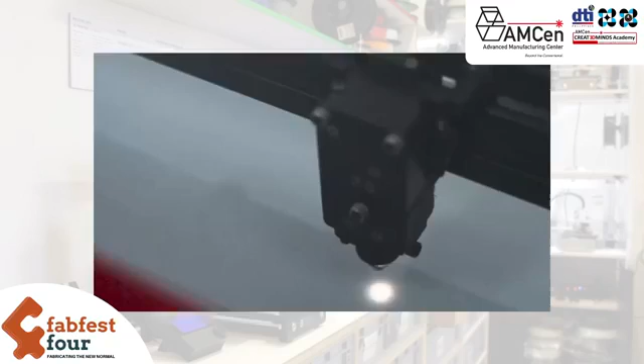A Fab Lab is an interdisciplinary space that promotes innovation through the use of digital fabrication tools. It's a modern facility that allows our SMEs to do prototyping.

For the last 1.5 years, we have been teaching them digital fabrication skills, which are very much in demand in the world market. For us, it really would support creation of maybe high-end products and development of new enterprises that are technology-based.

This will be the common service facility of industrial designing in the province of Bohol. There are even seminars, conferences, workshops conducted here so that Fab Lab enthusiasts and other designers would use the facility.

The concept was introduced to us by our Japanese volunteer, Mr. Yutaka Tokushima. He noticed in the course of his product development activities here that a lot of the problems in prototyping could be solved if we had the right equipment to do it.

We've catered to SMEs to really expand their market into the tourism sector. We have all these industries, and the thing is they're all spread out. I think having this Fab Lab would bring them all together.

True to its thrust in catalyzing innovation, DTI, through Fab Lab and its local partners, has initiated key programs, projects, and unique initiatives in the areas of waste upcycling and material engineering.

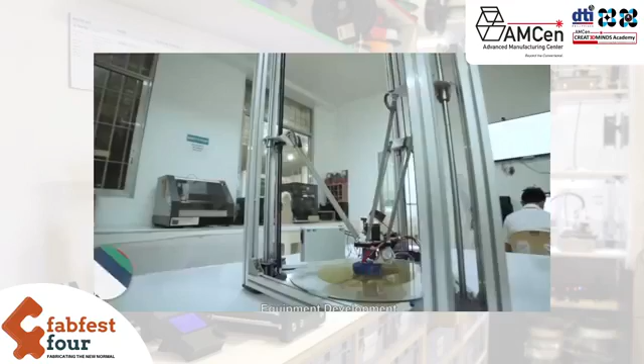Key MSME assistance initiatives such as product design, product development, productivity enhancement, and marketing solutions have been significant drivers in the improvement of grassroots entrepreneurs and homegrown innovators.

We do some native bags, placemats, wallets, curtains, and lately I do trophies and medals for the triathlon with the use of Fab Lab facilities.

The problem that artisans face here in Bohol are really the same challenges that any small business faces across the world, and that's how to get your product in front of your customer. So we developed a kiosk called the Made in Bohol Kiosk and sought to have it located in the luxury hotels where the tourists were staying.

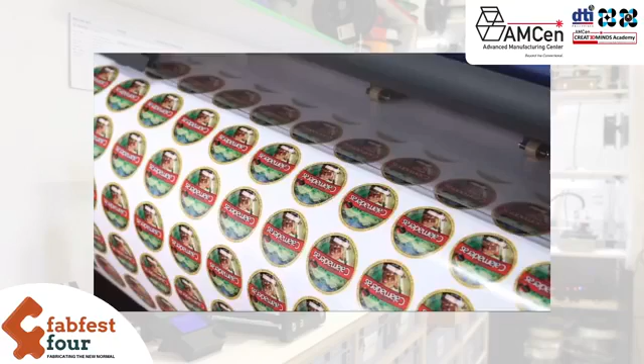When Fab Lab came, we had this partnership with them in order to become more competitive in the market.

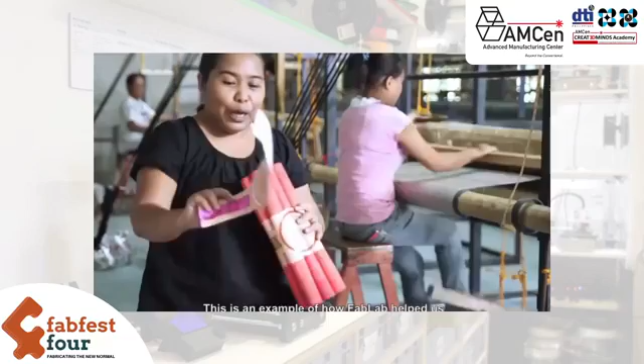So this is one of the Fab Lab products, our newest package for our placemats. We've sold a lot of these, and we're very thankful to FabLab.

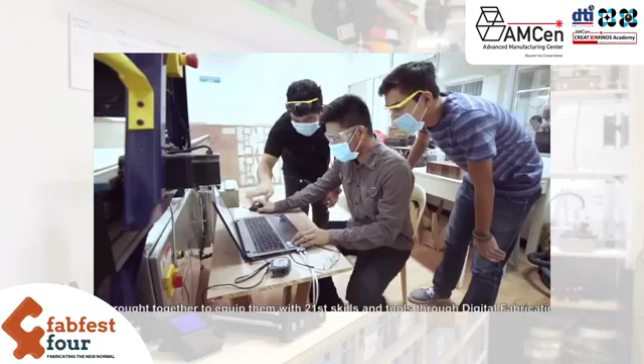To fuel global industry competitiveness, local entrepreneurs, students, and innovators are brought together to equip them with 21st century skills and tools through digital fabrication, technology trainings, and livelihood trainings and seminars.

It's for everyone. A lot of people really like to make almost anything. There's kids, there's adults, there's zero knowledge, there's some who already know a bit. When you see people come in with sparkly eyes, like, oh, this is possible, I can make something like this.

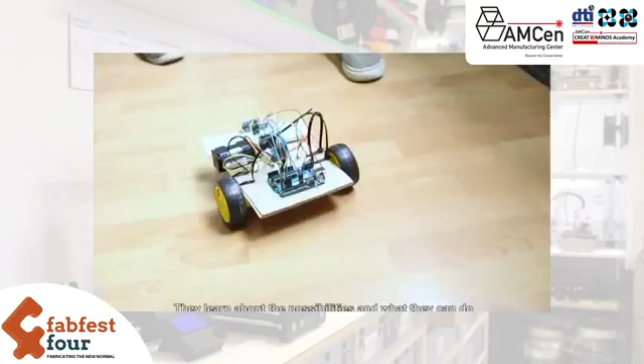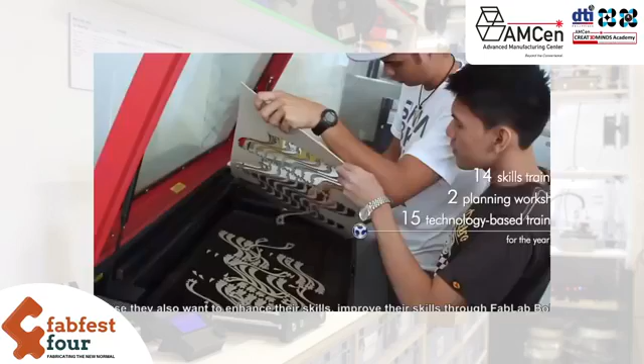The Department of Trade and Industry conducts workshops and trainings to help young local people here in the country, because they want to enhance and improve their skills by the use of FabLab Bohol. The concept of FabLab Bohol is to innovate and create inventions through digital fabrication. This FabLab should be duplicated in other regions because this is a good avenue for developing students' design skills so we could be at par with other countries in designing.

For me, it's like a gold mine. A gold mine for innovators because everything is there already: laser cutter, ShopBot, 3D printers, Arduinos, all these testers.

As of now, there are so many micro and kitchen-based enterprises that really need to improve or upgrade their technologies and equipment. That's why we are supporting FabLab, because it is our vision that this facility could help them in making those customized equipment.

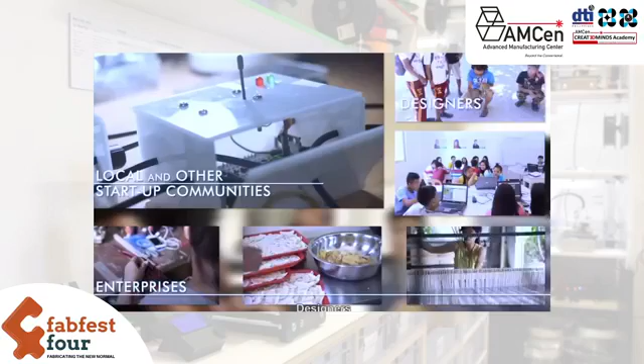The FabLab affords its users access to global knowledge through regular educational tours and access to the international FabLab network. Local and other Philippine startup communities, enterprises, designers, and enthusiasts are encouraged to collaborate amongst themselves to expand and strengthen their niche in various market networks.

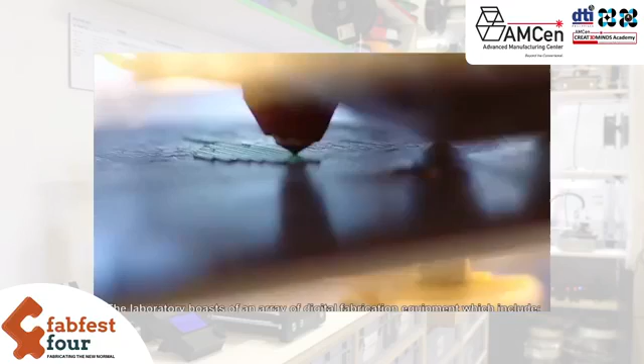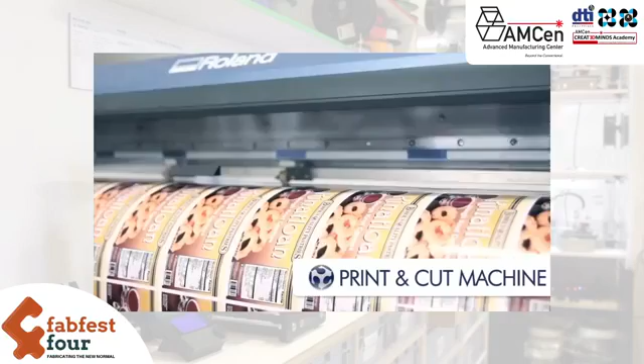The laboratory boasts an array of digital fabrication equipment which includes 3D printers, a digital embroidery machine, a print and cut machine, a CNC milling machine, and an automated wood milling machine.

FabLab Bohol also houses a pool of passionate in-house designers and highly skilled staff who can assist in 2D and 3D design, skills training, modeling, and production.

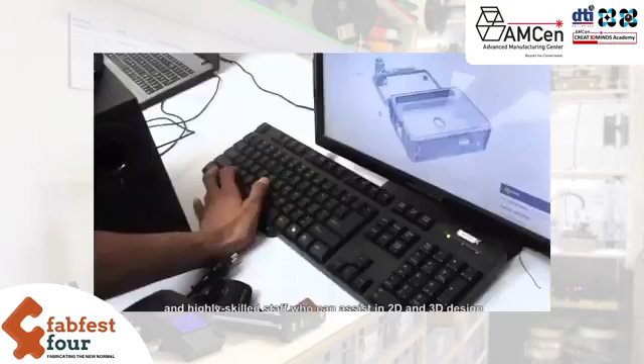Our task here is to assist those researchers and innovators. So what we did here is not for us to create their idea, but for them to create it themselves, and we will assist. In partnership with the DTI, Bohol Island State University, DOST, and the Japan International Cooperation Agency, or JICA, and the local community of enterprises, FabLab stands at the center of innovation in Bohol.

We are very thankful for the help of the DTI. They can give you a very good service and you really can come up with a very good product. We want the Bigan Weavers to really soar high, and our partnership with FabLab will bring us to that level. So thank you, FabLab and DTI.

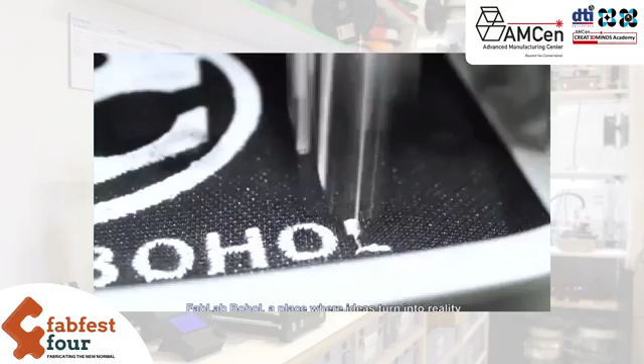FabLab Bohol, a place where ideas turn into reality. Ideas that can improve lives, not just for Boholanos, but for all Filipinos.

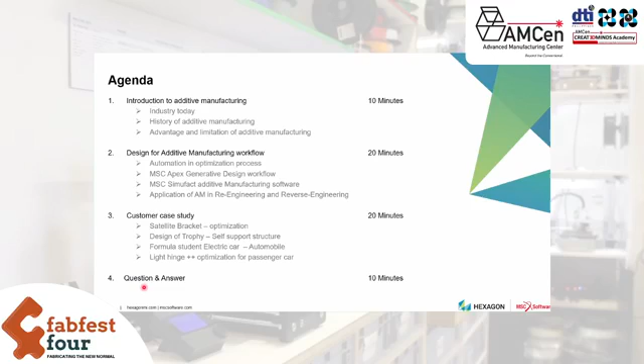Noted, sir. Thank you so much.

So today's industry, we talk about the industrial revolution, where we talk about different industries, like industry 4.0. If you look at each industrial revolution starting from 1.0, we have brought new technology to the industry. 1.0 talks about introducing mechanization majorly for the cotton industry, where human effort is replaced by mechanical gears and pulleys. Then 2.0 talks about introducing telephone and electricity, where the concept of batch production and mass production were brought into industry. 3.0 majorly talks about introducing computer and electronics, where we talk about more robots.

So we talk about software. When it comes to decision making, it should be able to make the decision without manual interface. It should be able to take the decision based on past history, or with the help of machine learning and artificial intelligence, so that it makes sure the errors are automatically corrected.

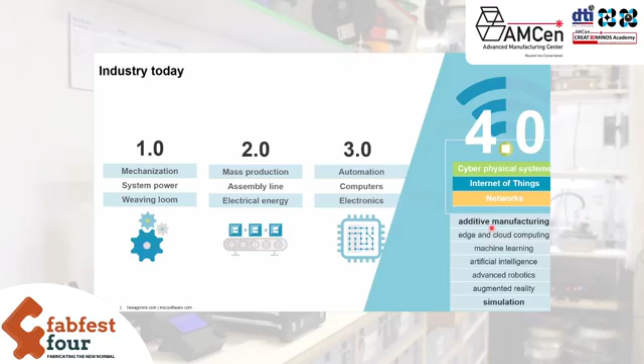So if we look at the major pillars, why we are more focusing on additive manufacturing nowadays - one of the major pillars for industry 4.0 is additive manufacturing. Also we talk about other new technologies like edge or cloud computing, machine learning, artificial intelligence, advanced robotics, augmented reality, simulation, and wireless communication. Having said this, today we will majorly focus on simulation tools - how simulation tools will help us in making sure we are in industry 4.0, and what is the development in additive manufacturing, starting from design, optimization, process simulation, and replacing our conventional component with the additively manufactured part.

The industries are slowly shifting towards 3D printing, and also we see other techniques like IoT - Internet of Things, digital twin, generative design, robotics. All of these are the new trends in the market where we are connecting the real world into the digital world.

So if you look at generative design alone, in the sense of topology optimization as we call it, it is predicted at least 19% growth every year, showing that every engineer working on CAD will have a topology optimization tool on his desk. All the new designs we create should pass through the optimization tool so that we save time, we save material, and all designs are optimized for the application.

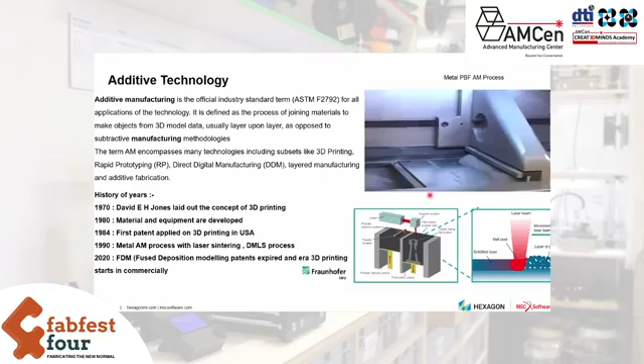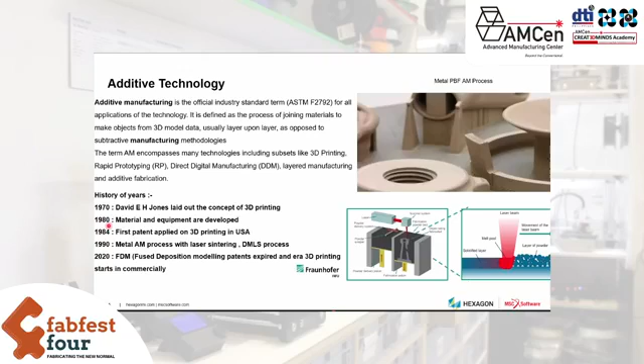So to understand, if we look at the history of the 3D printing process, it is not something new we are inventing or adopting now. It was there since the 1970s, where the first concept of 3D printing was laid out. Then the major development of material and machine development majorly started in the 1980s. The first patent on 3D printing was filed in 1984.

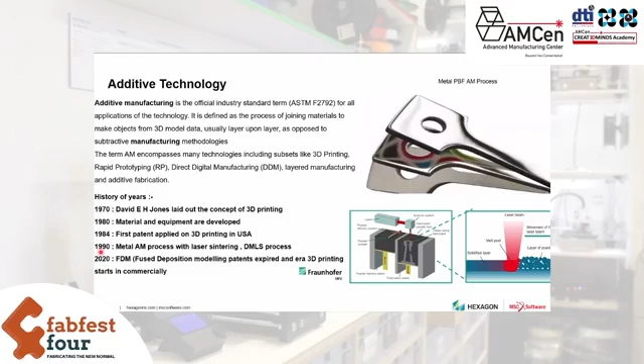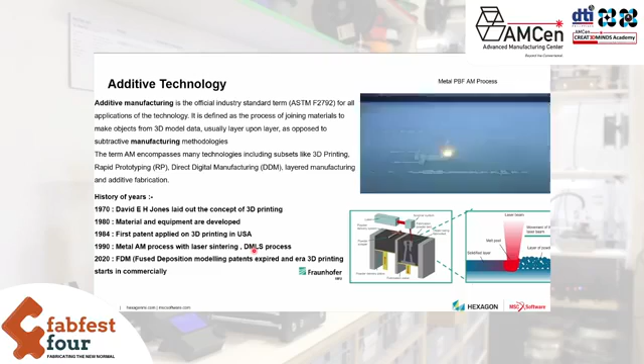The major development when it comes to metal additive manufacturing processes started in the 90s, where new AM processes were developed, like laser sintering, DMLS process, and powder bed fusion - and new materials. As of now, major challenges are limitations in material grade - those we are still working on. 2020 is quite important for plastic, polymer and composites, because a lot of patents are going to expire in 2020 for the FDM process, like the fused deposition modelling.

The advantage here is new players can come in, new technology and new material will come in, so we will have more flexibility in adaptation, and the market will see new players coming in, which makes it easier to adapt. So if you look at how it works, it's a layer by layer process.

We spread each layer of powder. If this picture shows powder bed fusion, each layer will be spread, then we use either a laser beam or an electron beam. If I'm using a laser beam, it is called the SLM process. If I'm using an electron beam instead of laser as a power source, then it is called EBM, electron beam melting. So I will melt only the solid portion where I want to have my solid component.

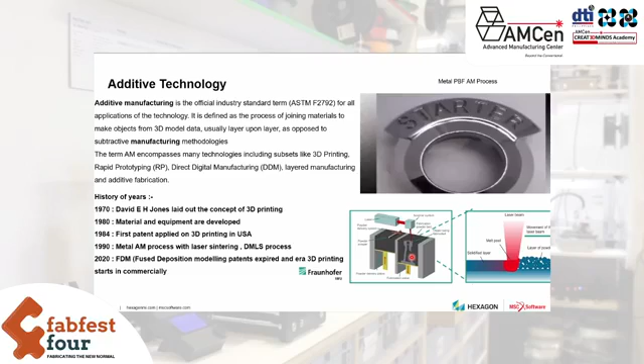The major advantage here compared to the conventional process: in conventional processes, we always start with a higher volume, then subtract material to get my final component. In additive manufacturing, it's a layer by layer process where we utilize the material only where we want the solid part. The rest remains as powder, which can be reused with some filtration.

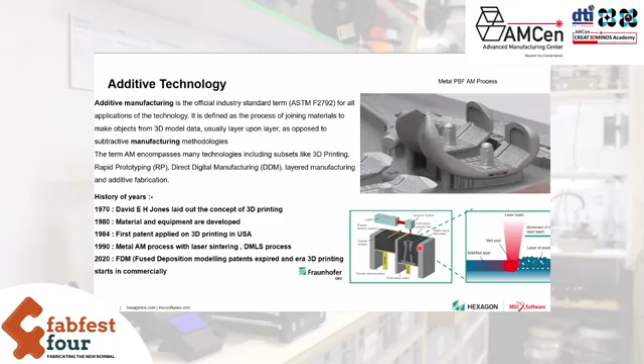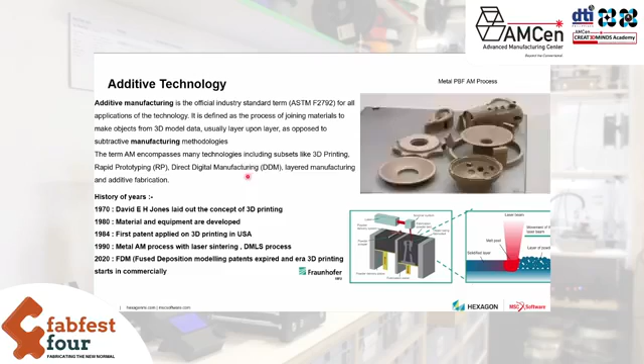Overall, additive manufacturing is not something new. It was already in the market under the name rapid prototyping, DDM process, or layered manufacturing. Now it has gained more attention under Industry 4.0. Major industries like aerospace, defense, or medical are slowly adopting this technology because the logistics is not much. So if you have any CAD design, you can quickly get it printed.

Now let's look at the different technologies within this. When I say 3D printing, it is not one technology. If I'm working on plastic and polymer, I have to go with FDM, fused deposition modelling. If I am working with polymerization or wet polymerization material, then I go with SLA and DLP.

The major advantage between these two processes: FDM is quite faster and more economic, but when it comes to surface quality, SLA gives very good surface quality or surface control. Then we have SLS based on the type of polymer I use.

If you are working on metal, then I can go with material jetting. Then we have binder jetting, which again can be used for metal and ceramic. Then we have powder bed fusion, where we have DMLS process, SLM and EBM. So we look majorly at powder bed fusion here.

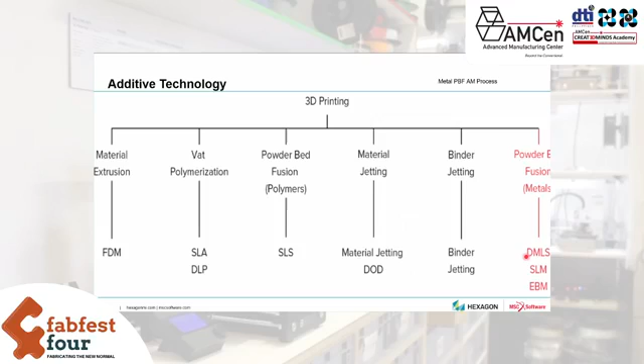In today's talk, we'll look at how we can use this process majorly to address challenges coming into metal, because plastic and polymer is not as expensive a process compared to metal. We can correct shrinkage and warpage in the FDM process with multiple printing or trial and error. But when it comes to metal, it is quite expensive because each print uses material, and the initial raw material and running cost is quite expensive. So we have to reduce the number of trials when it comes to metal additive manufacturing.

Let's see further classification based on the type of material we use. If you look at classification based on material: if you are working on polymer, it is suggested to go with either SLS or FDM process.

Again, it is dependent on what the end part usage is—either you want to use it as a simple application or appearance, or you want to use it as a thermal conductor, based on the type of end application. So you can select what kind of process to go with. Broadly, if you're working on polymers, you can go along with this technology.

If you are working on metals, then you can go with either DMLS or SLM process, or binder jetting technologies. If you're working on sand or ceramic, binder jet will also support sand, ceramic, and metal. So for any kind of material, you can go with binder jetting.

Binder jetting is quite adaptable—you can use either of the materials, though the initial setup needs quite a large space. But when it comes to other advantages, you can use multiple materials compared to the DMLS process, and it has its own unique advantage compared to the rest of the processes. So today we focus on powder bed fusion with the SLM process, selective laser melting.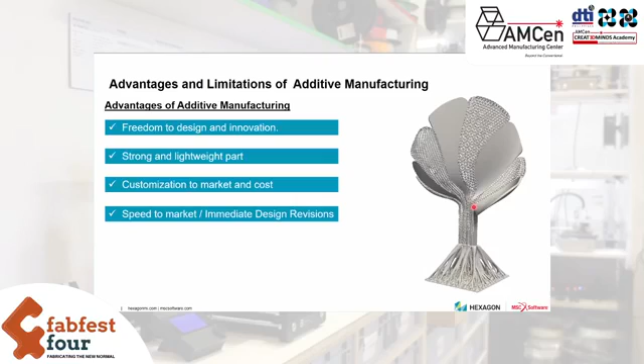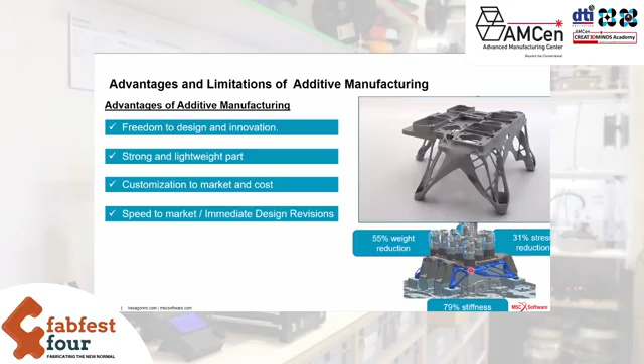We are not only creating new or fancy designs. We also make sure that whatever design we create or print using 3D printing is more stable, lightweighted, and more stiffer. We make sure it gives better life, making sure stresses are equally distributed throughout the component, so that we increase the fatigue life or durability of that component.

Then we talk about customization. Today we talk a lot about customization in the fashion industry. This is one example where we worked with a folding bicycle. Based on the user requirement, you can log into the website and define what kind of color of seat you want. We can design using Digimat software, design and develop our own material which suits the particular color. Also, we can take the passenger weight and optimize further based on the weight of the passenger.

Coming to the metal or structural component, we can use Apex Generative Design and further modify the bicycle based on the user demand, to develop a component for the customer. This kind of customization can be quickly done, get it printed, have the design realization, and give it back to the customer with no time. This is quite important, because when I say folding bicycle, it has to be always lightweight, because it will be carried by the human, so we fulfill all customer requirements.

Apart from that, we talk about speed to the market. This is quite important, because if I fail to launch my component to the market within the specified time, I will lose that design to the competition, or lose the market to the competitor where he can put his component or design into the market. So it is quite important to be on time or reduce the logistics. The greater advantage with 3D printing is whatever CAD model you have, you can quickly get it printed and have the design realization. Having said this, there are a lot of challenges.

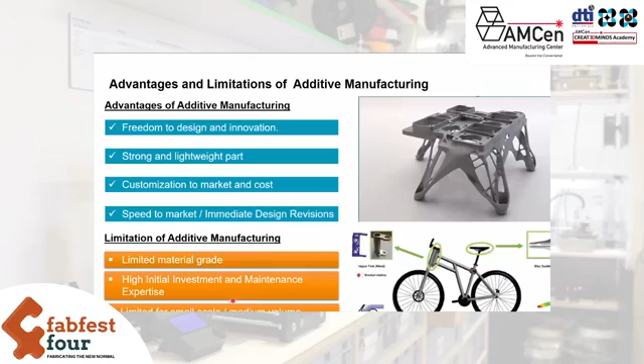When it comes to metal, we are still competing with forged and casted components. When it comes to the quality of the part, we always say 3D printed part is better than casted part, equal to the forged component. It's adopted by small and medium scale, not yet adopted or approved in large scale manufacturing industry. We are seeing a lot of growth, like recently HP has come up with a binder jetting technique where they claim it's 10x faster than the DMLS process. Like that, we have a lot of new technology coming, where we can overcome these challenges.

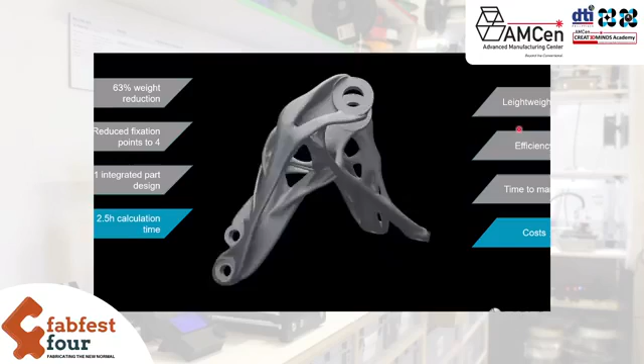So let's look at DfAM in detail. When I say topology optimization or designing for 3D printing process, we always target lightweighting. Then we want to make it more efficient, in terms of reducing material and using material in the proper way, so that I use the more efficient way of manufacturing it and time to the market, so I can quickly optimize it, get it printed, and validate the design.

And the cost. Cost is an important factor when it comes to industrial implementation, because we should have ROI for each and every component we manufacture. So these are the major focus. I have to reduce my material so that I can save the cost, reduce the material waste, again helping me save cost. And I have to be faster to market, so I should have quick design realization so that I can quickly go to market and get more benefit out of it.

So this is one example, an aerospace component where we reduced the weight by 63%. Not only did we reduce the weight, we even reduced the number of fixation points. If we look at the initial design, it has multiple fixation points, then we reduced that to 4 fixation points so that it can attach to the body or the surrounding component. Then we can have one integral design, in the sense instead of having multiple small components, we make sure we have a single component which delivers the design requirement.

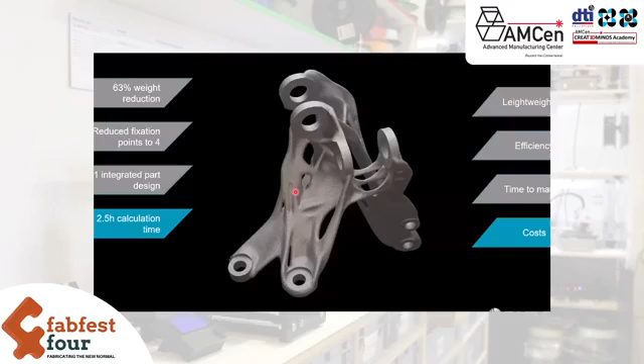If we look at today's AM optimization process or topology optimization process, we always start with creating the geometry in any CAD tool. Then we start with generating mesh for that, then we define the boundary condition, then it goes for optimization. Then we take that optimized design to other software for meshing, then it is taken to one more software for geometry cleaning, then verification will be done with the help of third-party software.

In this existing process, we use several different softwares, and there are chances that we may lose data or information while transferring from one software to another, and it requires a lot of human effort for meshing and geometry correction. To be frank, meshing and geometry correction can be automated. It need not be human effort - it can be automized, and the software can do the meshing and geometry correction automatically, better than what we do.

So what we have done is introduce an optimization technique. MSC Software acquired one of the German startups, called Amendate, then integrated it into MSC Apex. Amendate was majorly working on automation of things in terms of meshing. So now with MSC Apex Generative Design, you can either create the geometry or import the geometry and define your boundary condition and design goal. The rest - meshing, geometry cleaning, and smoothing - will be done automatically by the software, and it directly gives you the output in STL or CAD file format.

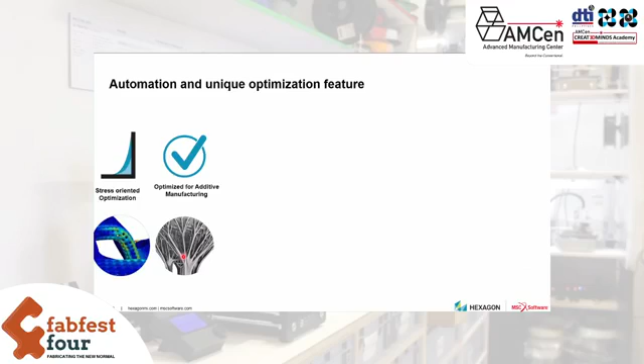So then it works for the optimization. If you want to create a self-supported structure like a tree root structure, or if you want to create lattices out of it, we can define this as a design goal, so that it will help us in creating this respective design. Then controlling the resolution will be done automatically.

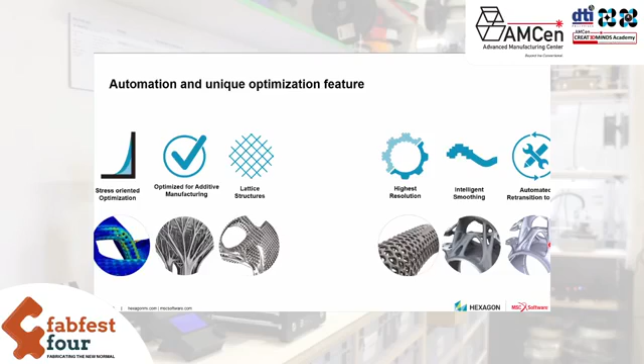The intelligent smoothing will be done automatically by the software. It also corrects the geometry, mainly smoothing the sharp edges and the area where we have critical cuts or lubrication holes or critical geometry, so that it generates the correct geometry, a parasolid or a step geometry, which can be used for further application.

With this, we are almost reducing our topology optimization or generative design process by 80%. Mainly what we are doing is we have added AM principles or automation in the background, which takes care of the optimization process. Also, we have a narrow AI algorithm, which is more of an artificial intelligence technique, but we call it narrow AI because we are not going to the higher level of artificial intelligence.

So we are using a narrow AI algorithm where it studies each and every design, checking what is the percentage of change between the new design and the old design during topology optimization. It compares with the old design, and we can define this threshold - if there is a 10% change compared to the previous design, only then does it go for the next variant. This way, a lot of time in remeshing and defining boundary conditions is avoided, so the software is much faster compared to any software available in the market.

Even with our own product, we have MSC Nastran, and compared to that, this is much faster because we have added a lot of new algorithms into it.

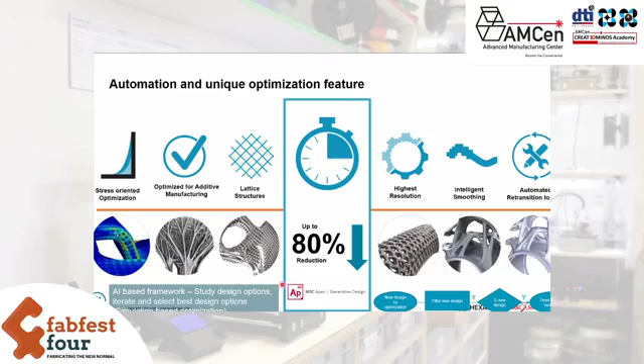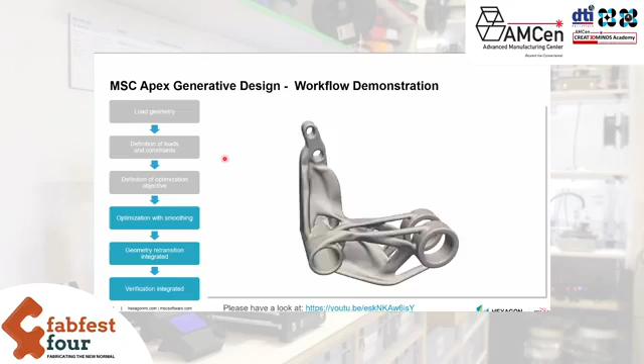The greater advantage comes when it comes to defining the thickness and minimum angle. For example, if I'm doing optimization for additive manufacturing, we should consider the AM principle during the design stage itself - that is, the minimum thickness and the angle. When I say topology optimization, it majorly focuses on just weight reduction without considering what kind of manufacturing process I use. When I say generative design, it includes the manufacturability of that optimized design.

Whatever weight reduction I do, it should give a design which is more realistic for manufacturing. Otherwise, if I do topology optimization and reduce 90% of weight, my design looks fancy, but I'm not able to manufacture it because I've reduced the material to less than 1mm, which is critical to print. If I'm using aluminum material with 3D printing, and I optimize a part to less than 1mm, it is critical to print.

So this is a manufacturing principle, and we should know all these manufacturing principles during the design stage itself, so that while doing my optimization, I give my minimum thickness and minimum angle, so it will not optimize less than that. These features are only available in generative design, so that it optimizes and gives me the geometry which is more feasible for manufacturing - either for AM application or for sheet metal forming, or any kind of application.

So if you look at the complete process here, we load the geometry, define the boundary conditions, then define what is my design goal - what is the maximum stress allowed, what are the design and non-design space fixations. The rest of the parameters will be done automatically by the software.

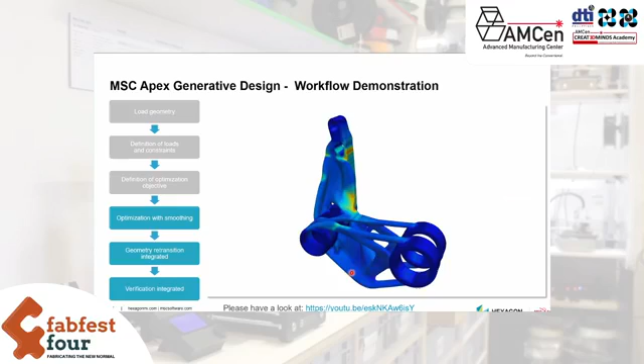So this is design for additive manufacturing. We always say it's a 360-degree cycle. Most of the time we get the geometry, define the boundary condition, and we will have an optimized design candidate in terms of weight reduction or material saving. But this is just a 180-degree optimization, we don't want to stop here.

So we have to start with our initial design, optimize it for the AM process. Then you have multiple design candidates. When you say topology optimization or generative design, you end up with multiple designs or multiple iterations. You are not sure which design suits your application unless you validate for life, validate for manufacturability, or check the design for durability.

So if you want to complete the 360-degree cycle of design for additive manufacturing, we have to start with understanding the initial design, optimize it with the new material or with weight reduction, so then you have multiple design candidates.

Take each iteration or each design to Simufact Additive, validate for 3D printing, whether I can print this part successfully without any failure. Then take this 3D printed part, along with the residual stresses and distortion, and validate it for life or fatigue life of the component.

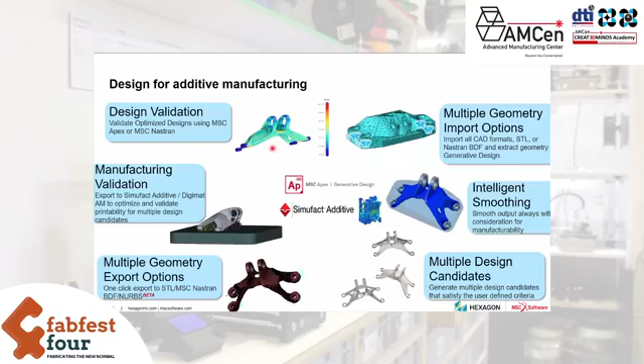So once I validate for manufacturability and life, I can select one of the best designs and go for printing. Since we have already validated, it's easy to replace the conventional design with the 3D printed component, using a combination of Apex Generative Design and additive manufacturing process. This is one example where we used an end-to-end application, starting from understanding the initial design.

If you look here, this is the initial design of a wheel hub for a race car. We started with understanding the initial design, then used MSC Apex Generative Design to optimize the geometry, then took that optimized geometry forward.

When I say optimization, we end up with multiple design candidates. Unless we check it for life and manufacturability, we are not sure which design is good, which design is critical for printing, and which design is critical for our application. So here we optimized it.

Then we took that optimized geometry for validation of manufacturability, meaning 3D printing validation. We could then determine whether I can print this part without any crack, and how best I can print this part.

Then we took this 3D printed component to Adams, where we put the same boundary condition and loading, and checked the durability of the component. So now we have end-to-end validation in the CAE tool. Then we went for printing this part, and it was right the first time, and we could replace our conventional design with the 3D printed part.

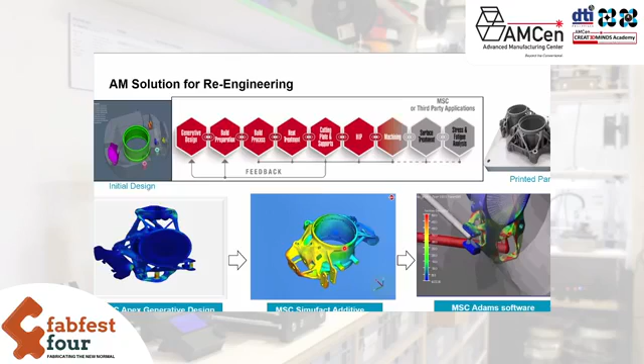So this is a re-engineering process where we always start with understanding the initial design, weight reduction or topology optimization, then validating for manufacturability and life.

If we talk about a reverse engineering process, we worked with one truck manufacturer where they wanted 10 gears which were conventionally manufactured. He wanted 10 more gears for R&D purposes, but he couldn't develop a whole logistics or conventional manufacturing process just to get 10 gears.

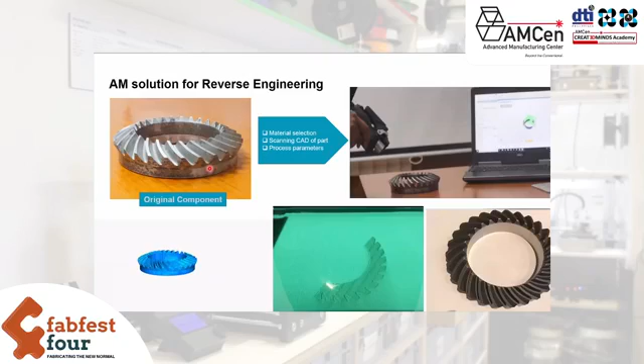So what we did is we took the existing design, which was conventionally manufactured with CNC and forging. We scanned this part and took that scan geometry directly into Simufact, which can read cloud data or point data. Then we simulated the best way of printing, with the best support structure, controlling the distortion.

So then we give this optimized process parameter directly to the machine. With this, we were able to print this part successfully right at the first time, without much trial and error. We were able to print it, do the wire cut, and deliver the component which was requested by one of the truck manufacturers. The whole process was complete in just 3 weeks.

We got the component from the customer, scanned it, and took it into Simufact for process optimization. Then we were able to print it and deliver it back. When we kept both next to each other, most people find it difficult to identify which one is 3D printed and which is conventionally manufactured.

So that's a greater advantage here. If I want to go with the conventional way, it takes at least 3 to 7 months. If I go with 3D printing, it can be done in just 3 to 4 weeks, not more than that. So that's a greater advantage when it comes to the reverse engineering application.

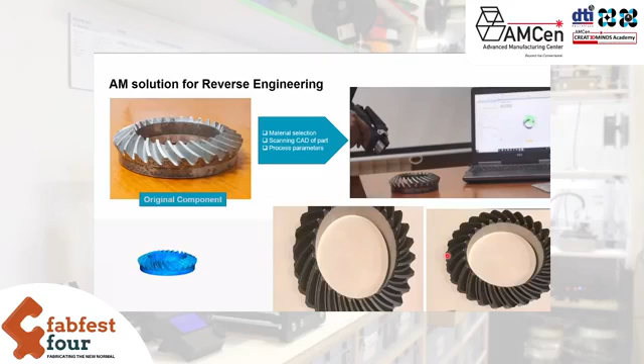We do have a lot of case studies in both re-engineering and reverse engineering. You can refer to those on our website. So now the more important part here.

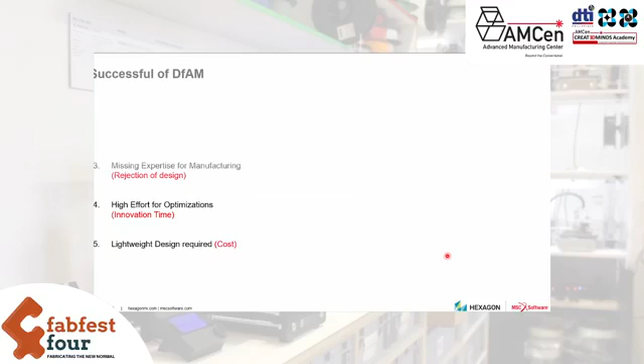How do we succeed in design for AM? These are the points we should majorly focus on. When I say optimization, we directly run into the software using the existing design, try to apply lattices or honeycomb structures, but it's not really helpful.

Most of the time, what we found is any new design, or if you want to be successful in design, we have to look for new design ideas based on the application. So lattices is not the solution for all designs.

We have to look at what is the existing boundary condition and loads coming over there. We have to understand in detail the stresses and apply new design thoughts into that.

Also, a lot of automation tools are available now, so you need not do the manual meshing or geometry cleaning. Make sure you use the new automation tools.

Always add AM intelligence, in the sense if you're designing a part for additive manufacturing, make sure that AM principles are considered during the topology optimization stage itself.

While optimizing, make sure what kind of material you are using, whether FDM or metal. As I already said, if you're going with AlSi10Mg material and optimizing below 1mm, it's nearly impossible to manufacture using the AM process. Those kind of AM or manufacturing thoughts should be applied during the design for AM process.

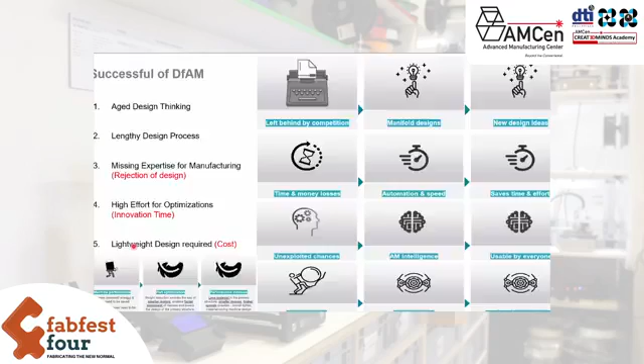So now going into a few case studies. I selected a few case studies to explain how the optimization was done and how we reduce the weight. There are a couple of case studies which you can refer to on our website: one on a race car, one on a passenger car where we did weight lightening of a hinge component, and one on a medical implant where we worked with a hospital to support a tumor patient. There are also case studies on aerospace, defense, and other applications.

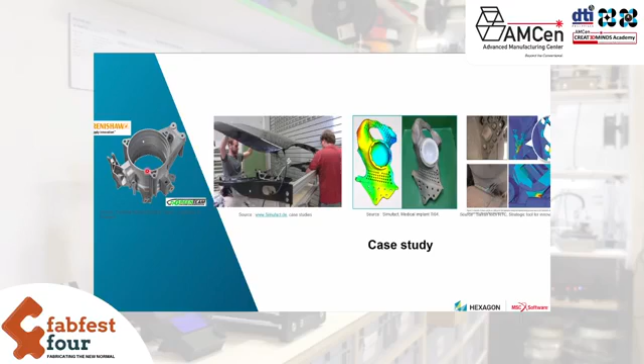We'll look at the first two case studies in detail, along with a couple of case studies on lightweighting. This one is a satellite bracket where we worked on optimization.

We always start with understanding the conventional design—what is design and non-design space, and what loads are coming over. Then we go with optimization of the geometry. In this case, with optimization we could bring weight reduction of 55%.

At the same time, we are not only focusing on weight reduction—we make sure the component is stiffer, and we make sure we cannot make stress zero. We always make sure stresses are equally distributed so that I can increase the life of the component. So there's one example where the satellite bracket was optimized.

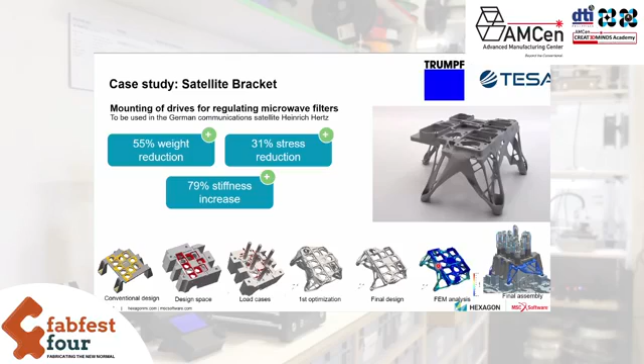Previously it was cracking after launching some satellites, cracking right here, so we gave some extra coating there. After that, we thought, why can't we optimize in such a way that stresses are equally distributed and we get better life of the component. So it was optimized and 3D printed, giving us better life compared to the conventional design.

This is the GE bracket challenge. We always say when you do topology optimization, you end up with one design. But with MSC Apex Generative Design, based on the end application—whether optimizing for structural application, acoustic, or 3D printing—based on the end application, I can get a design candidate which suits that.

If I'm doing a structural application, I cannot go with lattices because of the multiple dynamics of loading coming over. I have to have a more stout, thicker, or stiffer design for structural application. If I'm going for acoustic, I don't want to change the surface level since I'm playing with acoustics, so I can keep the same surface and just optimize the thickness. When going with AM, I can have a different design candidate. So with the same set of boundary conditions, based on the application, we can have different kinds of design candidates.

That's quite unique, because if you go with Nastran or any other tools available in the market, irrespective of what application you're using, you get just one design output, whether for structural, aero, or 3D printing application. With Simufact, along with Apex Generative Design and Simufact Additive, you can have different design candidates, get validated for 3D printing, and even validate for life—so you're not only creating a new design, but validating for life and manufacturability, justifying your design optimization.

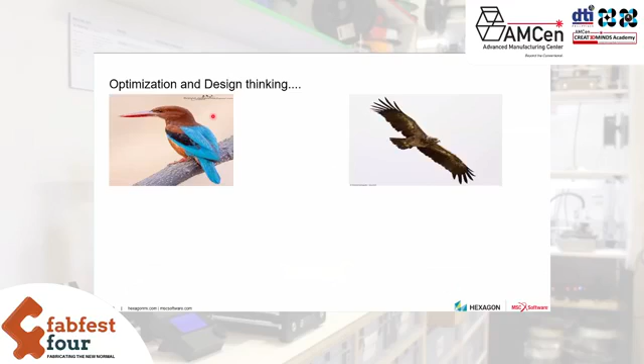So these are examples inspired by nature. When I say optimization, there are a lot of ideas available around us.

For example, if we look at the Japan bullet train, which was making a noise when passing through the tunnel, it was inspired by the Kingfisher. It was designed in such a way that the noise is reduced by inspiring by the Kingfisher, what we call the Kingfisher nose.

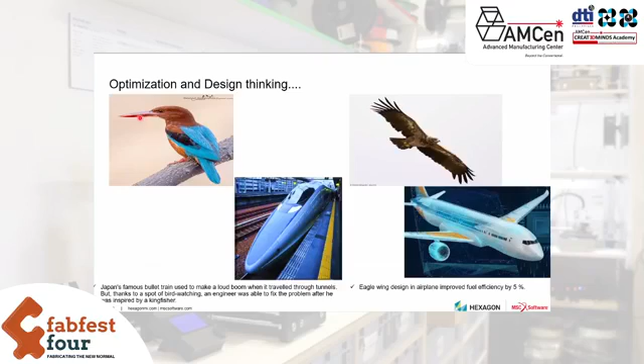Then when we talk about optimization of airplane wing, they adapted the eagle wing in the airplane wing, which helped improve efficiency by 5%. So we always say, don't limit your thinking by the software. Try to get the new design, then use the software to apply those designs.

So we had the same approach, where we got this self-supported tree structure from one of the engineers. We thought, why can't we use this self-supporting tree root structure for one of the trophy designs, so that we optimize this base with self-support.

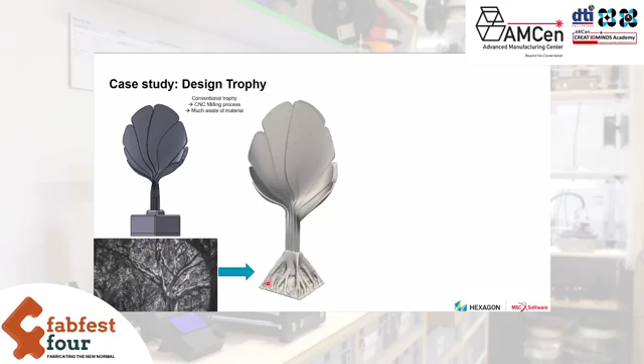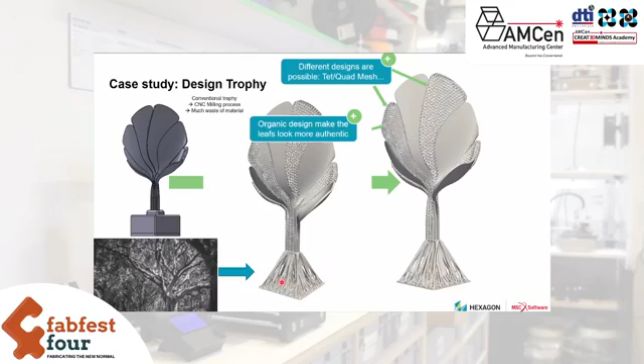When you use this kind of structure, you need not provide supports. There's no need of generating support during the 3D printing process. Then we adopted lattice plus solid and self-supported structures. With this we could reduce the weight as well as create an authentic design. So then we could print this part without any support.

So this is the kind of idea we get from nature. Don't always restrict yourself to the software. Get the new idea from outside and try to use the software to validate those designs. This is one of the best examples for that.

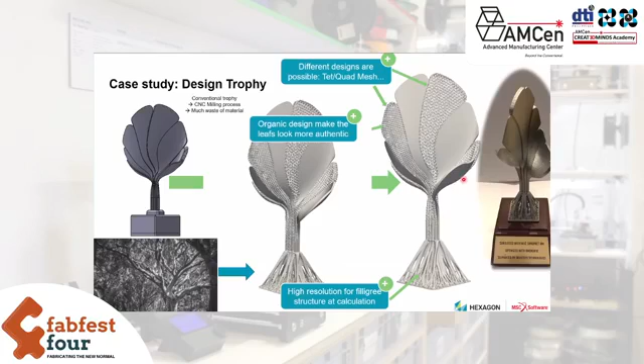There are a lot of examples like optimized drones, biocompatible lattices, and more on structural components. All this optimization was done in Apex Generative Design and validated with Simufact Additive.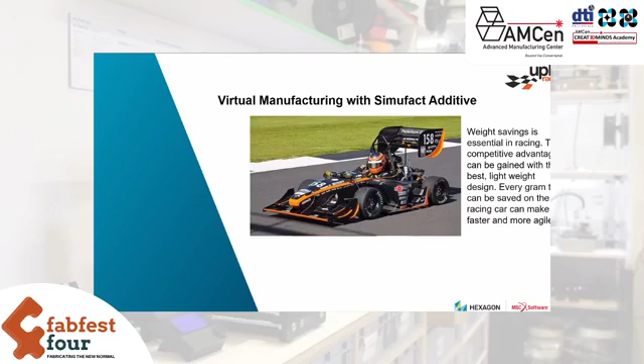Also, 1% of weight reduction increases my speed of the car, and also makes my car more fuel efficient. So we started with the initial design.

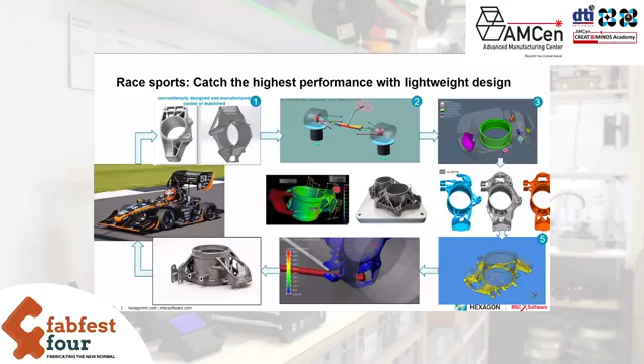Then we understand the loads coming over there with MSC Adams. Then we selected the design and non-design space. Then we got different design candidates. We validated for manufacturability, then validated for life. We could print and CT scan it, then we could replace the existing design.

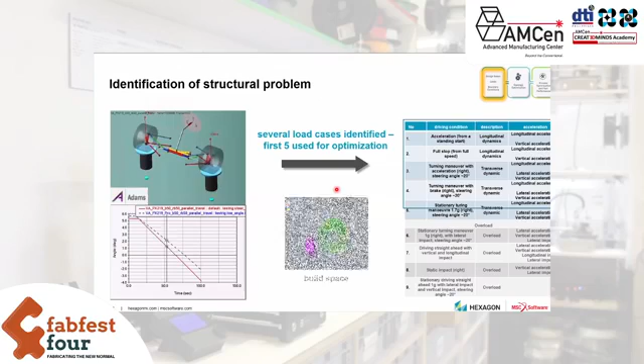So how do we start it? First, we understand the initial design and critical loading to define the design and non-design space. Then we optimized it using Apex Generative Design.

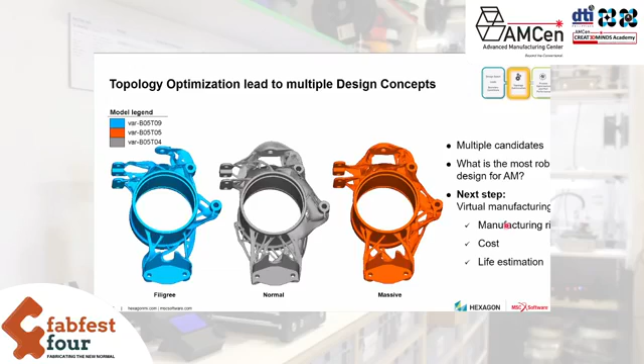Then each design is validated for manufacturability, and we estimated the cost and life of it. With Simufact Additive, we check the manufacturability, making sure there are no cracks during printing and that it can be printed without any manufacturing risk.

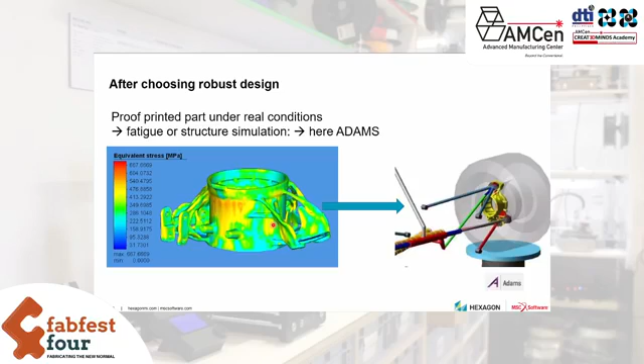Then we took back all the studies, how much support we need if I print each part. Then we took into account the manufacturing residual stresses. We replaced the initial design with the optimized one, and validated for the durability or fatigue life of it.

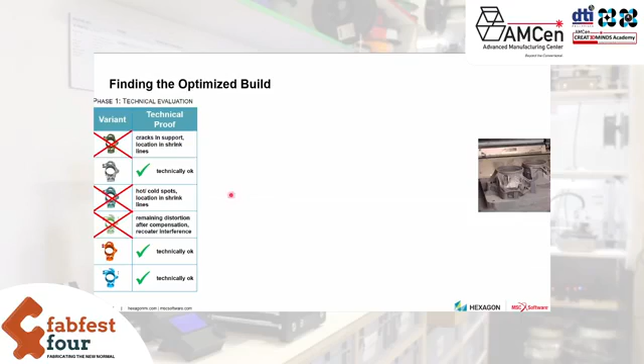With this, we could technically evaluate as well as evaluate commercially, calculating the cost for it. Then we could select one design which is technically qualified as well as commercially qualified.

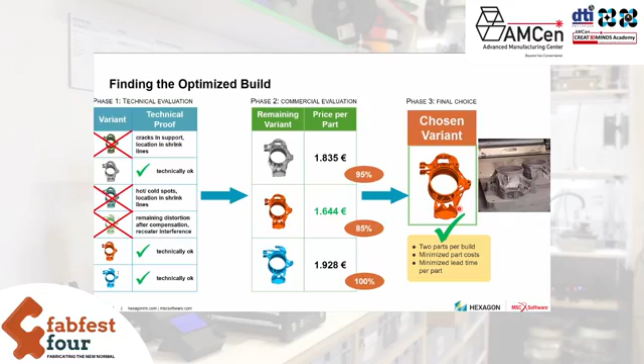So for any new design, most of the time we pass through all these phases. First, we technically evaluate, can the design withstand the load? Can I manufacture it? Then I go for calculating cost for each component, if I print one part or multiple parts, how much cost I can reduce. Then I can select one of the best designs for manufacturing.

So this is a design where we could print and put it back in place. This has been running quite successfully for the last 1.5 years. We have a lot of cases like this where we digitally or virtually validated the design, then printed and replaced the conventional part with the additively manufactured part.

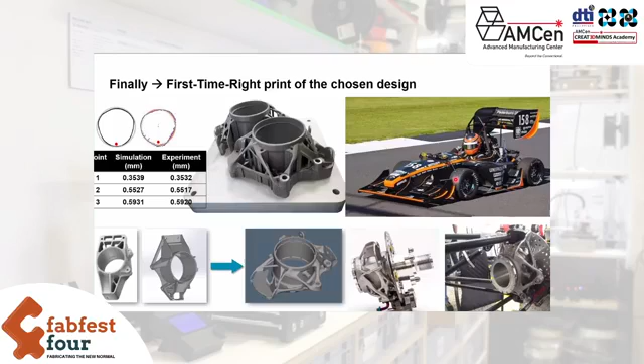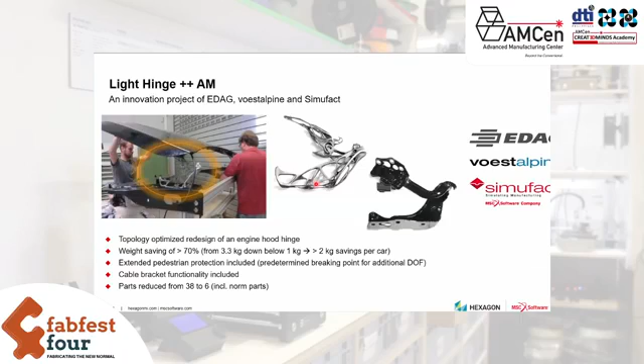So with lightweighting of the component, we selected one of the 316L components, conventionally forged and sheet metal. We could optimize it, and with optimization we could reduce the weight by 70%. We also reduced a lot of integral parts like nuts and bolts, which reduced the assembly component count. Then we structurally validated for the life of it.

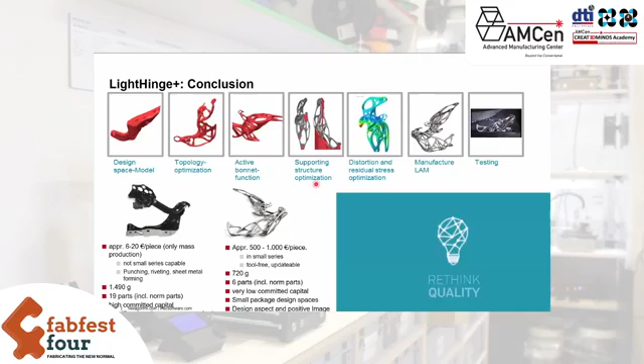So then we provide an end-to-end solution, starting from design, optimization, and testing. I will not spend much time here.

So we have a lot of e-learning training and software licensing options. If you want to understand more in detail, you can visit our website. Just to give a background, we have solutions for material development, topology optimization, and 3D printing. It can be metal, polymer, or plastic, and we have different solvers.

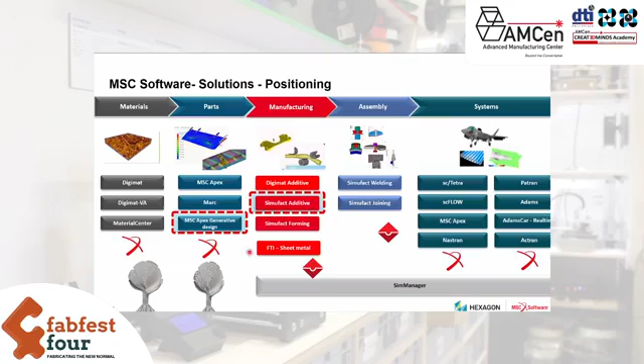If you want to validate for life, you can use Nastran, and we have different solvers together. Basically, MSC software started with Nastran, NASA Structural Code for Space Application. Then it acquired different solvers for different physics, because the same physics cannot be applied for different applications. If you're working in materials, you need different equations. So we've categorized different tools based on application usage, whether you're working in material development, optimization, manufacturing, assembly, validation, or system level optimization.

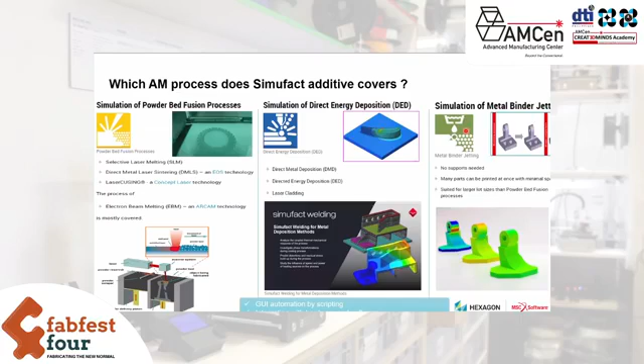We don't only focus on 3D printing, we're also focusing on other techniques like direct energy deposition and metal binder jetting. Metal binder jetting has a greater advantage - there's no support required and it can address large scale production issues. There's a lot of development happening in the current industry in terms of DMLS process, printing process, DED, repair process, and metal binder jetting for automobile applications.

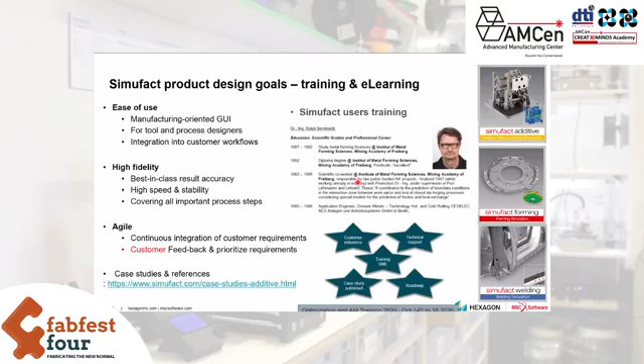Now it's time for question and answer. Thank you so much, Mr. Santosh Nagaraju, that was very enlightening, especially for us. I'm personally a big fan of generative design, and I know most of you here, especially in the chat box right now, are very excited about generative design in general. I have a couple of questions, but first, if you guys have questions, maybe right now is the right time to raise them up.

Okay, if you don't have one, let me start with a couple of questions. I think the most obvious concern right now, especially if you try to minimize the amount of material you add into the manufacturing, would be about the durability of the final product compared to the fully printed output. Is that a valid concern for us, especially since you mentioned it's like 70% more efficient?

Yeah, so as a general rule, from our experience, when we say topology optimization, we always try to focus on only reducing material - but that is not our end goal. We have to make sure the component is much stiffer, and gives equivalent or better life compared to the conventional design. It's always better to start with understanding the initial loadings and boundary conditions.